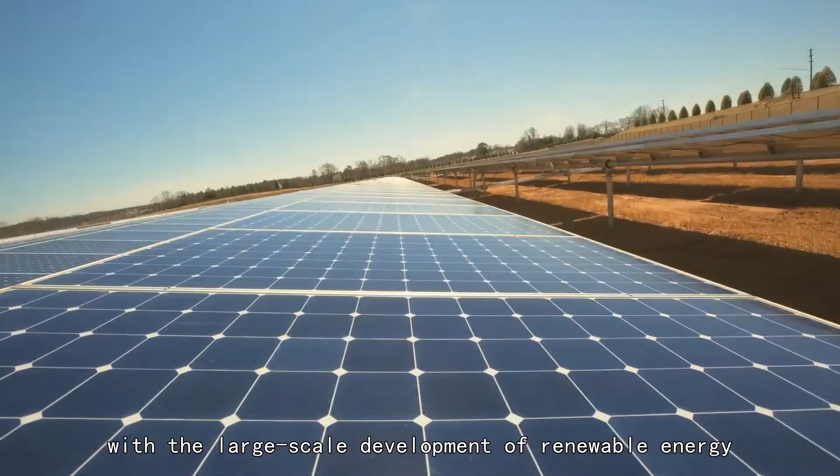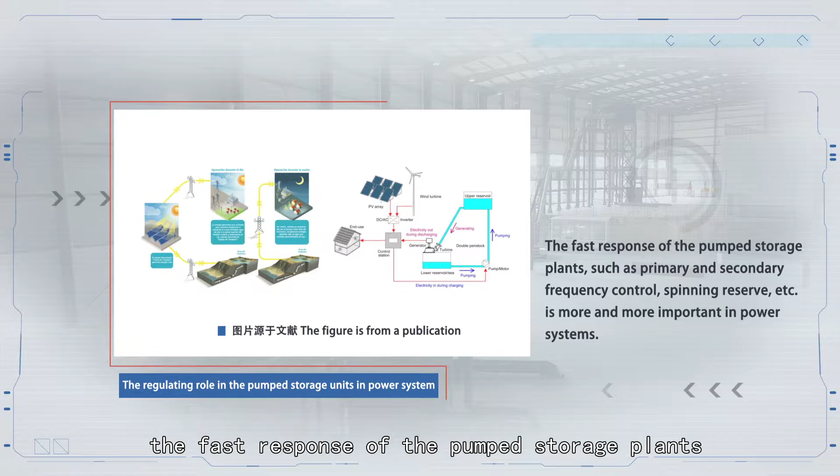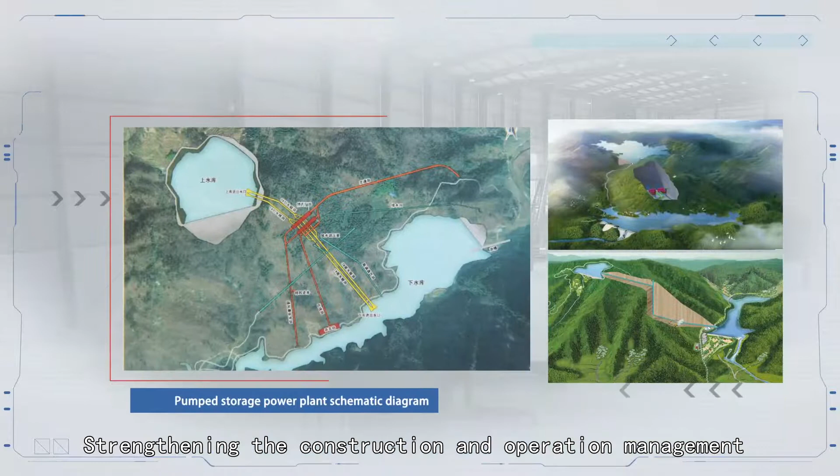At present, with the large-scale development of renewable energy, the integration of distributed generation, and the rapid development of the power market in China, the fast response of the pumped storage plants, such as primary and secondary frequency control, spinning reserve, etc., is more and more important in power systems. Strengthening the construction and operation management of pumped storage plants has become a key strategy of China's electric power development.

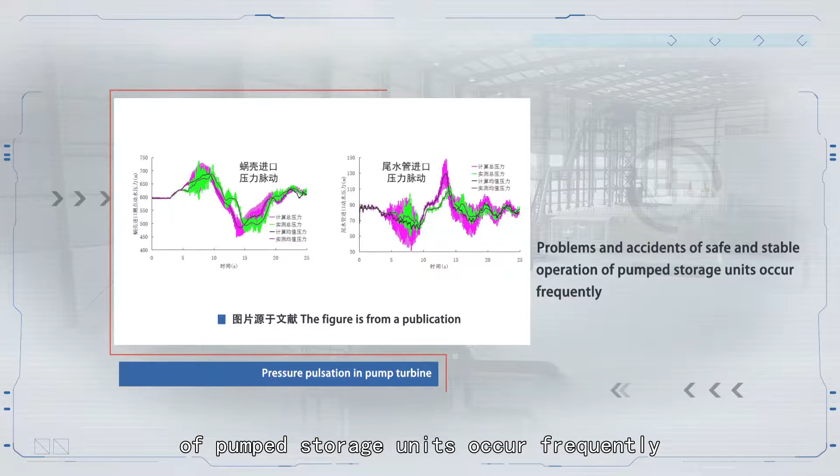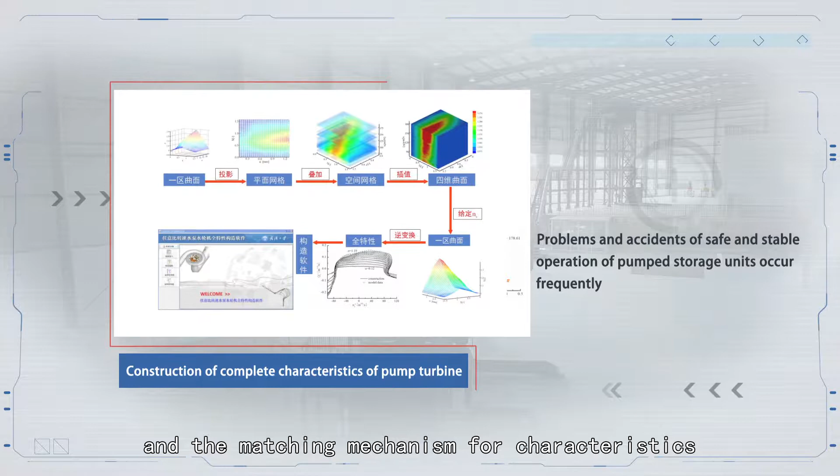However, problems and accidents of safe and stable operation of pumped storage units occur frequently. A key reason is the defects of theories about complete characteristics of pump turbine and the matching mechanism for characteristics of water system and pumped storage units. While physical model experiment is an important research method to study these problems.

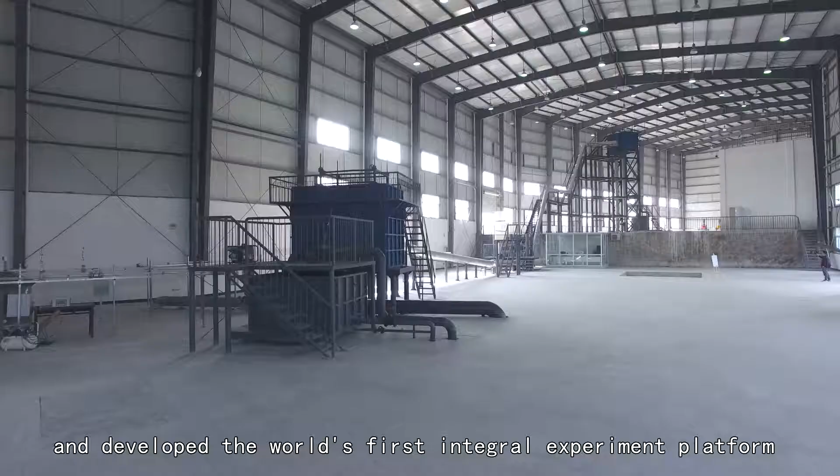The research team of safe operation of hydropower plants belongs to the State Key Laboratory of Water Resources and Hydropower Engineering Science in Wuhan University. It established the experiment hall of pumped storage plants, and developed the world's first integral experiment platform of transient processes of pumped storage plants.

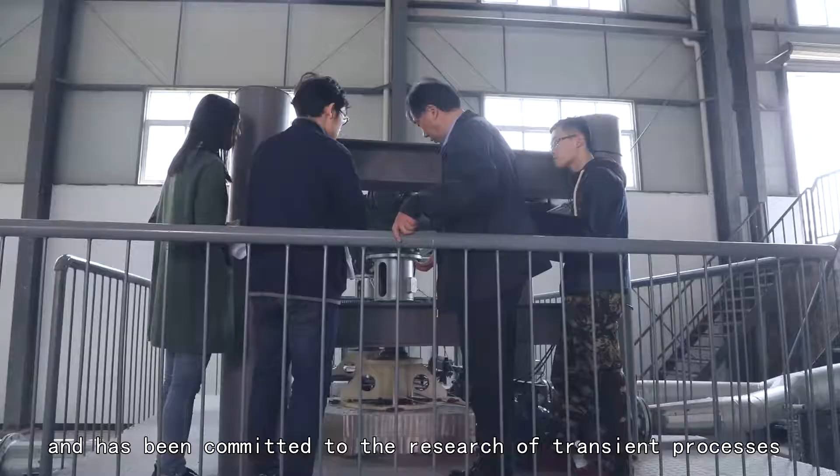The research team was set up in the 1950s and has been committed to the research of transient processes and control of hydropower plants for a long time, and it built the ministerial-level key laboratory of transient processes and control of hydropower plants inside the campus of Wuhan University.

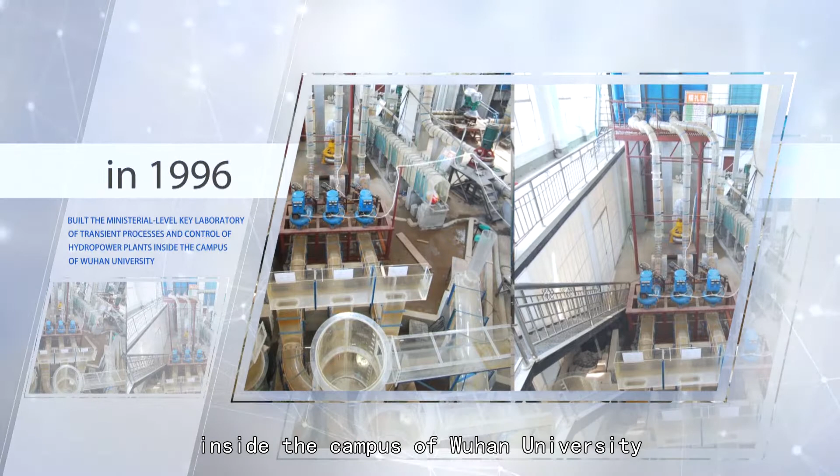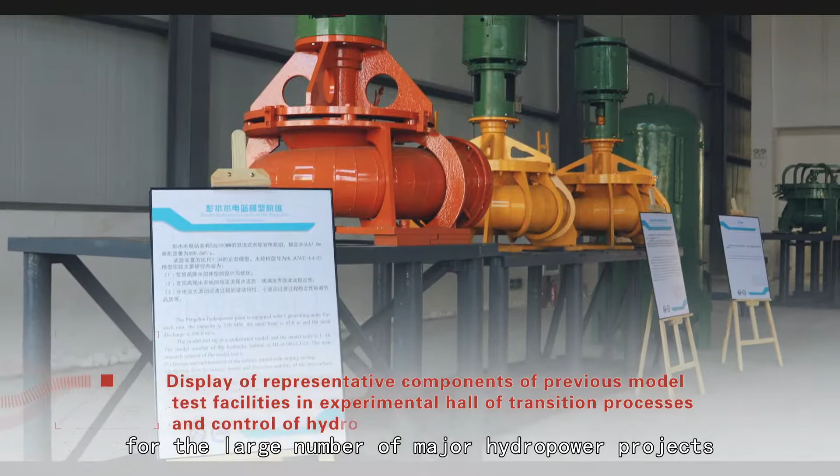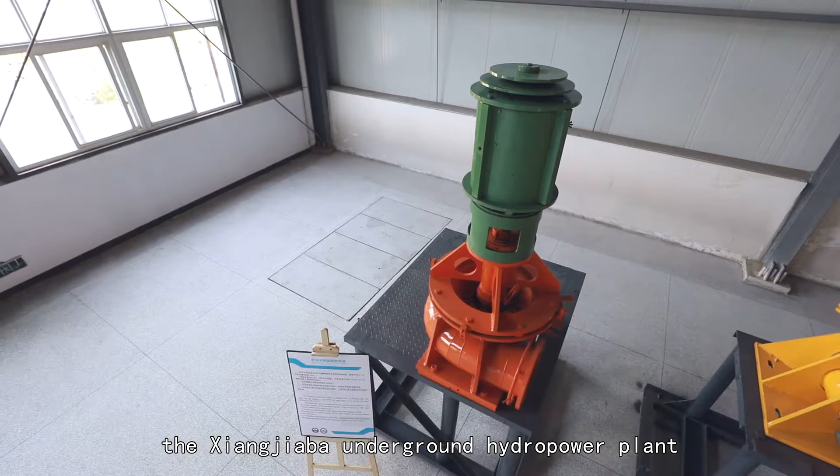The research team, with Professor Yang Jiandong as the academic leader, carried out a series of model experiments for a large number of major hydropower projects, such as the Right Bank Underground Power Plant of the Three Gorges Project, the Xiangjiaba Underground Hydropower Plant, and the Pengshui Hydropower Plant, etc. The research results applied into the design and operation of more than 30 large hydropower plants and more than 20 pump storage plants in China.

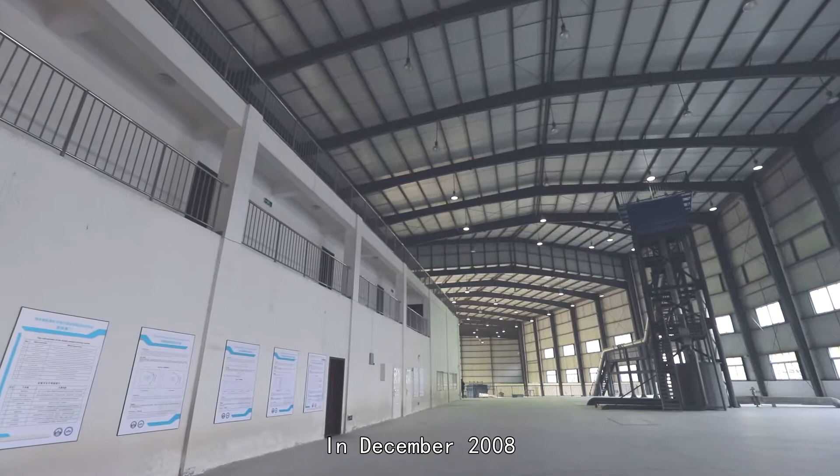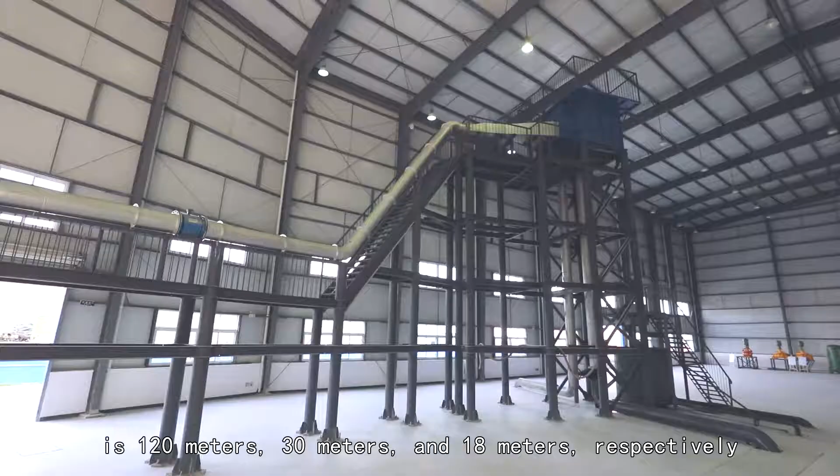In 2008, the research team won the second-class prize of the State Scientific and Technological Progress Award. In December 2008, the construction of the experimental hall of pump storage plants in Wuhan University started, and it was basically completed in December 2012. The length, width, and height of the experiment hall is 120 meters, 30 meters, and 18 meters respectively. The integral experiment platform of transient processes of pump storage plants is composed of the following 9 subsystems.

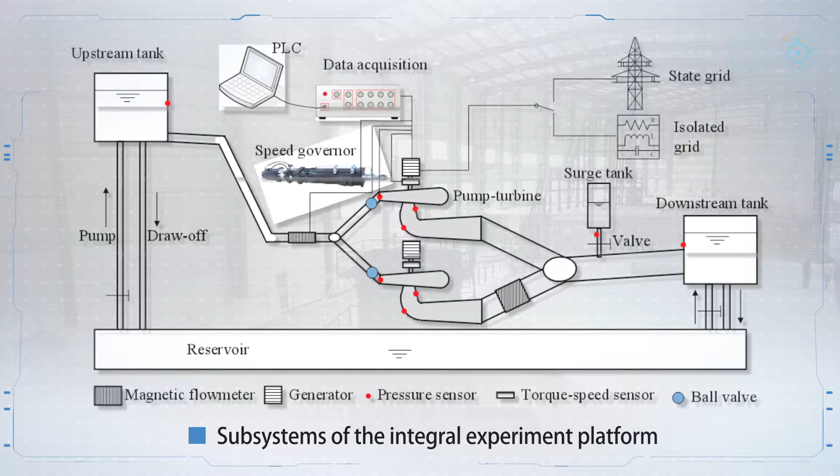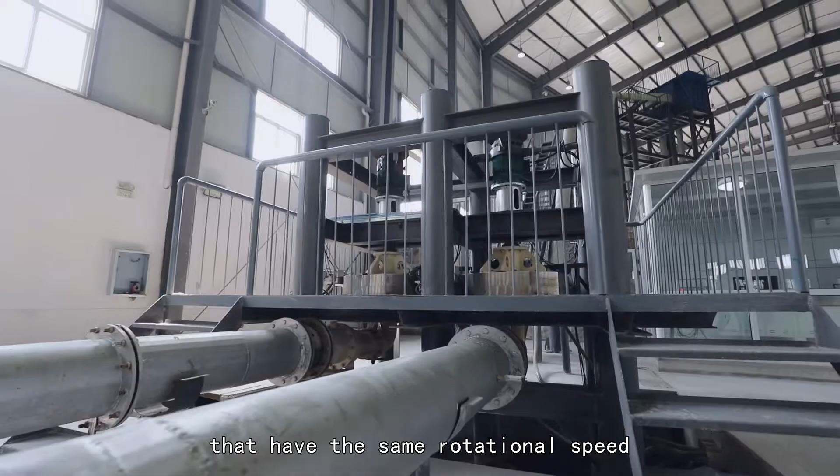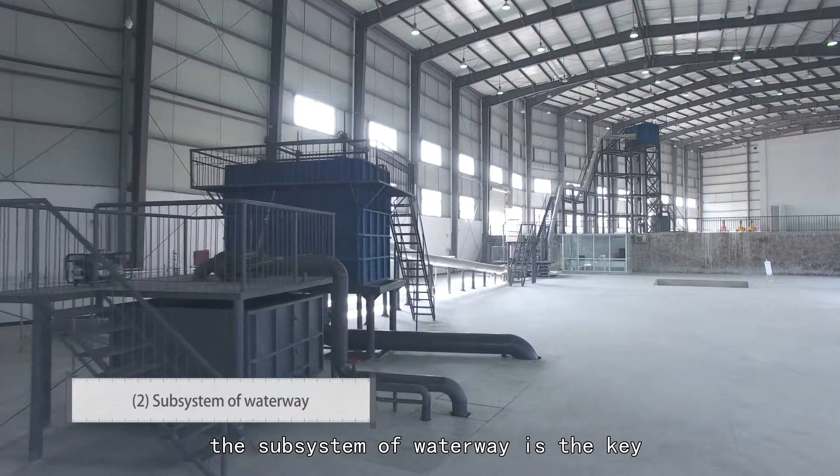First, the subsystem of model units includes 2 sets of reversible pump turbines and generator motors that have the same rotational speed but obviously different S-shaped characteristics, and this system is crucial for the model experiments. Second, the subsystem of waterway is the key to study the hydraulic characteristics of the system. It is composed of upper and lower reservoirs, pipelines, branch pipes, tailrace surge tank, etc. And the 2 units share the common pipeline.

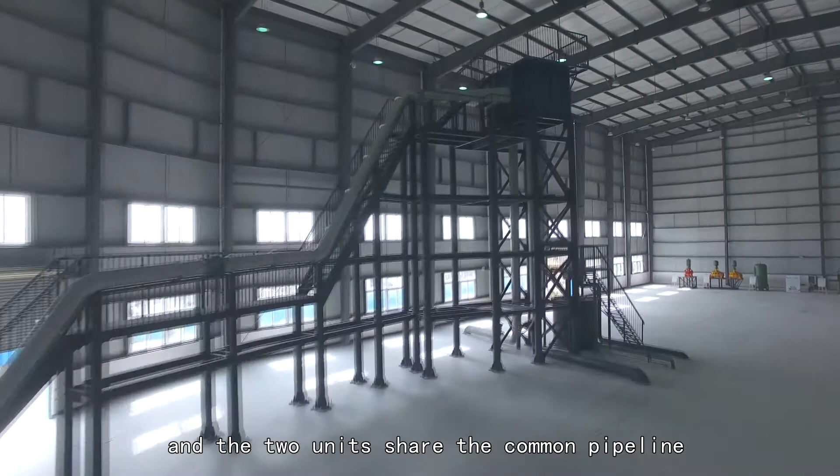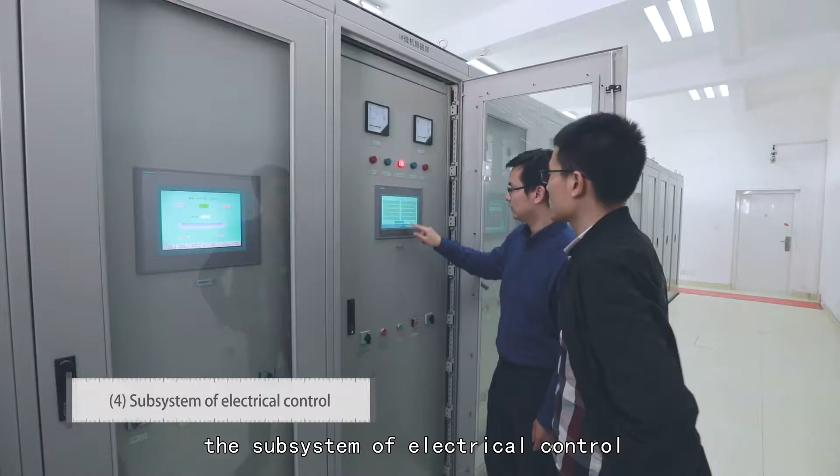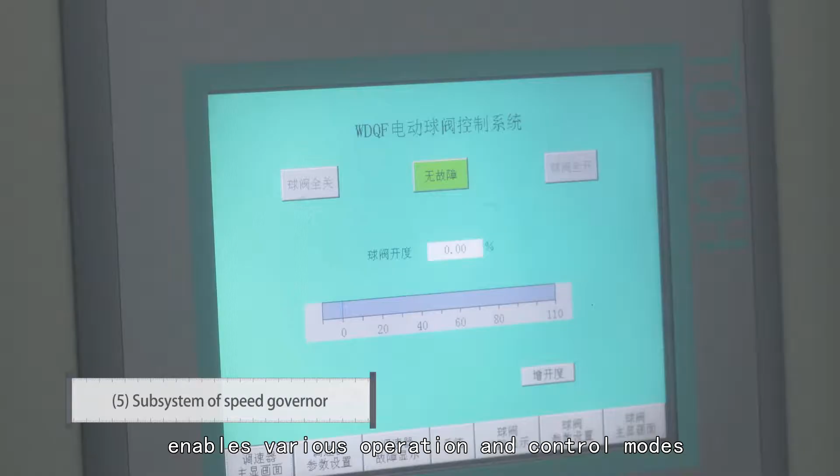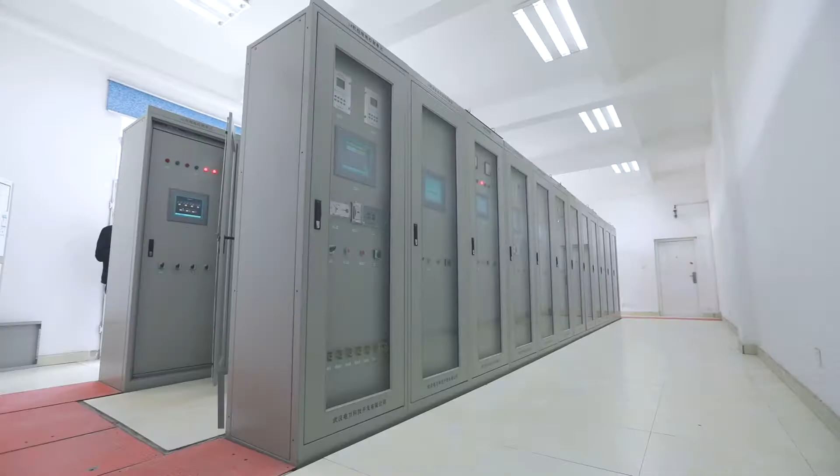Third, the subsystem of circulating water provides circulating water for the model experiments. Fourth, the subsystem of electrical control is for the excitation control, synchronization, and protection of the generator motors. Fifth, the subsystem of speed governor enables various operation and control modes for the model pump storage units. Sixth, the subsystem of converter and commutation mainly provides the functions of variable frequency startup and switch between pumping and generation of pump turbines. Seventh, the subsystem of electrical load provides RLC load for the model experiments under isolated operating condition. In addition, the model units can also operate under the grid-connected condition.

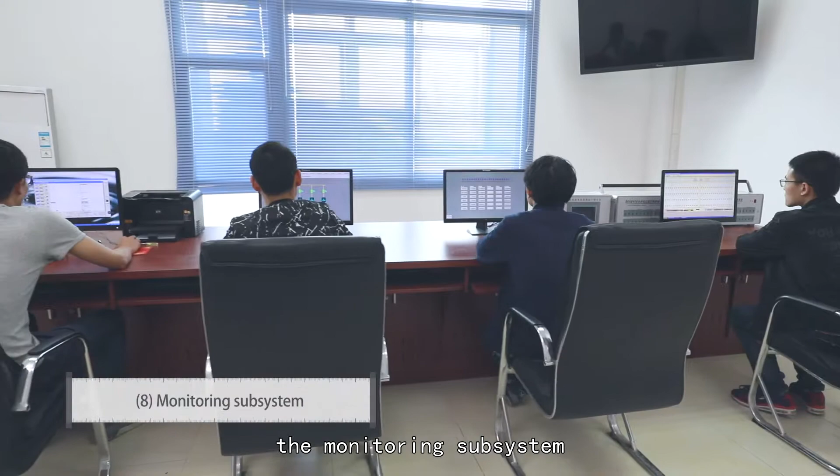Eighth, the monitoring subsystem provides the function of operation instruction, data acquisition and processing, safety monitoring for the model experiments. Ninth, the measurement subsystem provides the functions of fast acquisition, processing and analysis of various physical quantities for the model experiments.

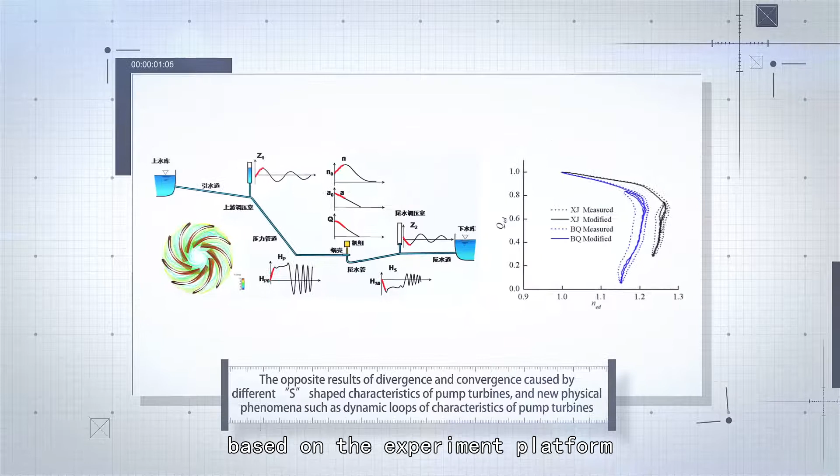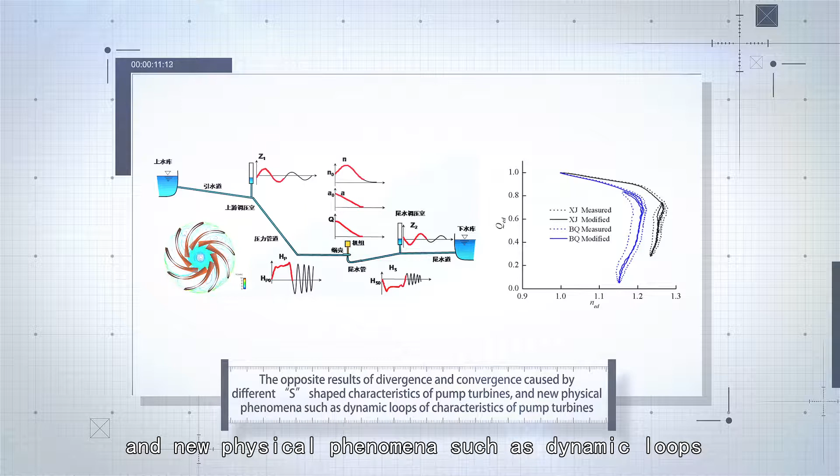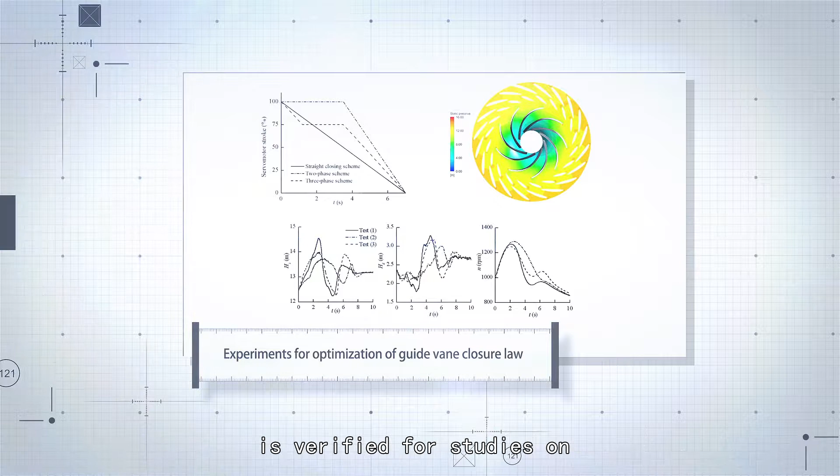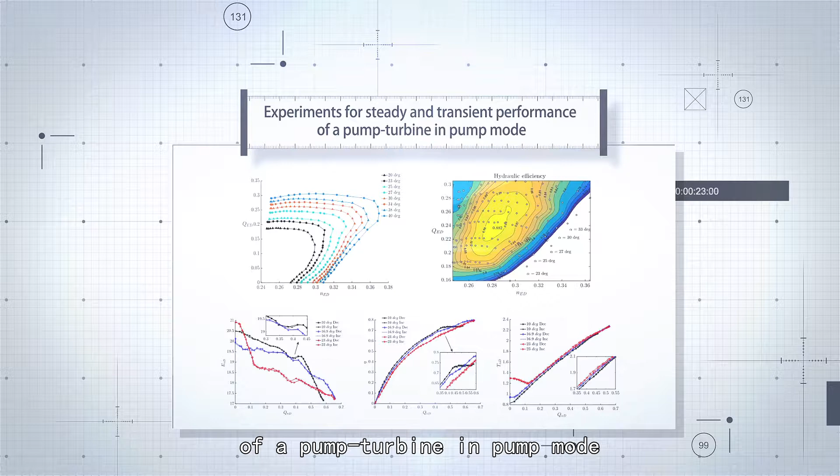Compared with the similar studies worldwide, based on the experiment platform, the opposite results of divergence and convergence caused by different S-shaped characteristics of pump turbines and new physical phenomena such as dynamic loops of characteristics of pump turbines are observed. The results of theoretical deduction and numerical simulation are verified for studies on optimization of guide vane closure law, the runaway stability criterion, steady and transient performance of a pump turbine in pump mode, and stability of hydropower generation system, etc.

The research team wrote the book Transient Processes of Pump Storage Units in Chinese in 2017 and published over 30 international journal papers and actively attended international conferences in the recent 3 years. The research team members actively set up international cooperation with Uppsala University in Sweden, Adelaide University in Australia, and Kathmandu University in Nepal. The team members are also invited to compile the International Electrotechnical Commission Guide for Transients of Hydraulic Machineries and are responsible for drafting the section regarding the scaled physical model experiment of hydropower plants.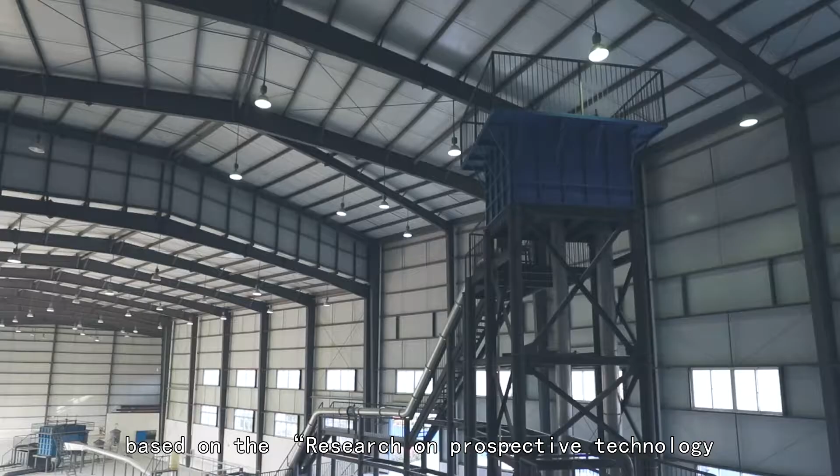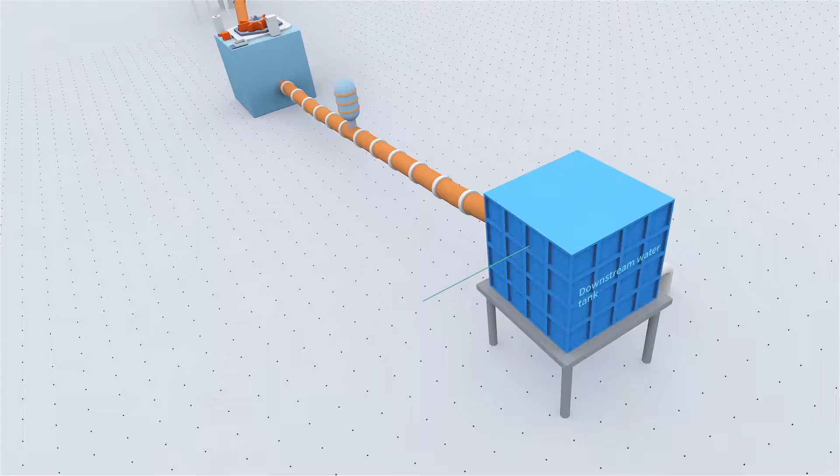Currently, based on the research on prospective technology of seawater pump storage plants in the National Key Research and Development Program of China, a new experiment platform of seawater pump storage plants is in development in the experimental hall, and it is characterized by the key equipment such as the variable speed reversible pump storage units and its control system, the downstream water tank that can simulate the wave fluctuation, the upstream closed pressure tank with adjustable pressure and discharge, etc. This platform aims for laying a theoretical foundation for the follow-up construction and operation of real seawater pump storage plants in China.

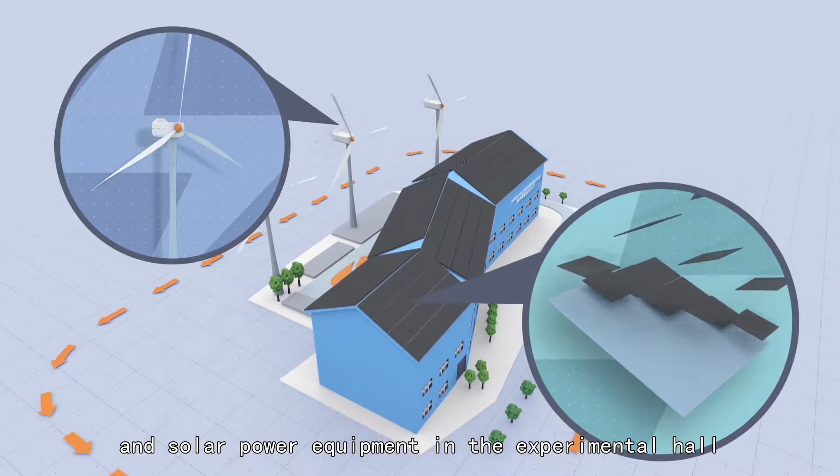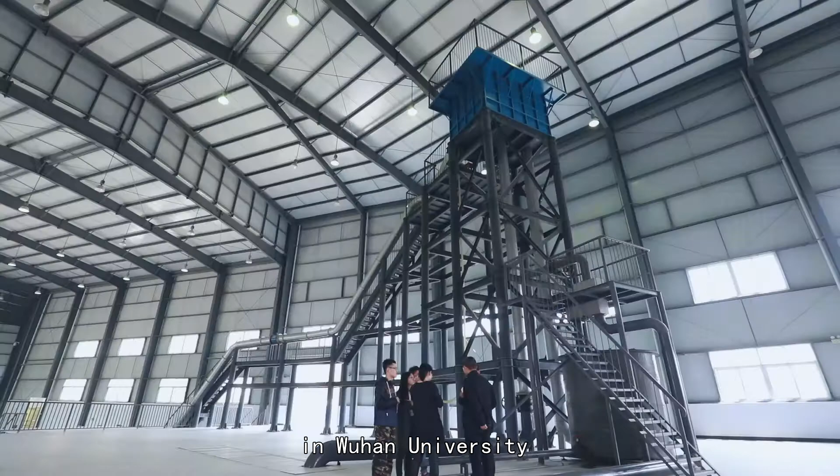For the future works, it is planned to install suitable wind and solar power equipment in the experimental hall to develop an intelligent microgrid system with variable speed pump storage, wind-solar hybrid operation, and to conduct systematic research on the dynamic characteristics of microgrids with 100% renewable energy generation. The research team of the State Key Laboratory of Water Resources and Hydropower Engineering Science in Wuhan University will strive to provide solid theoretical support for innovation and upgrading of China's pump storage technology.